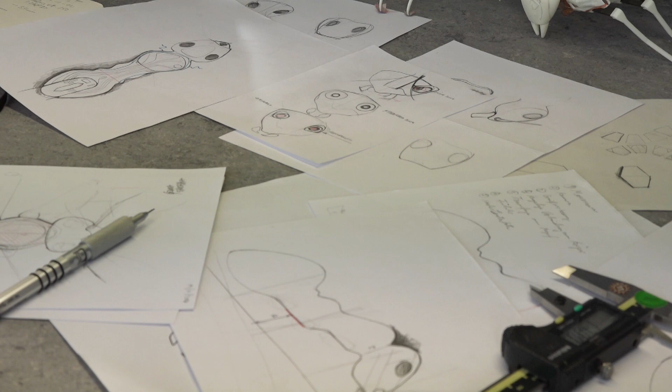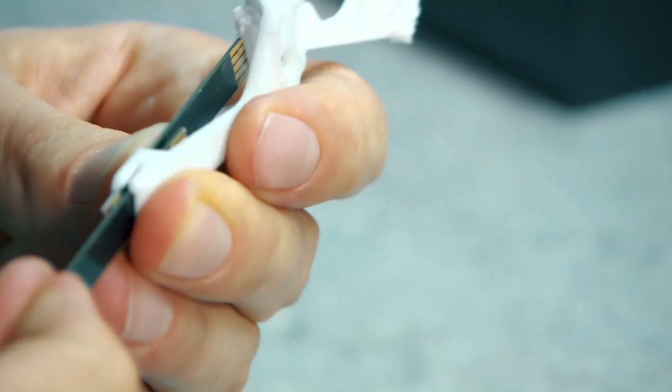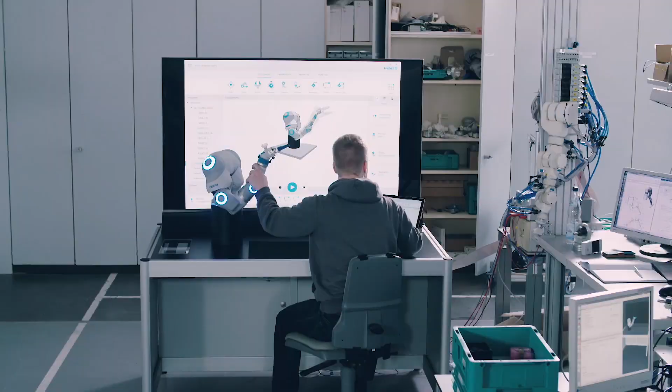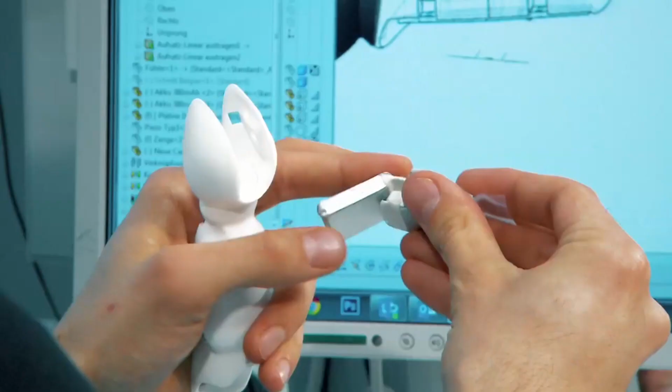I was mainly interested in moving objects, so robotics was the most interesting field, of course. Professions like engineers, computer scientists, technicians, and so on are employed in the world of robotics. A common thread in all these professions is that they are interested in solving problems and in guaranteeing functionality. However, robots still have certain reputations among humans in today's world because they still look like weird and complex machines. Therefore, it is very important that designers deal with robotics in order to give robots a form that looks natural to people and at the same time provide forms of communication that better suit people.

And that is where designers come into play.

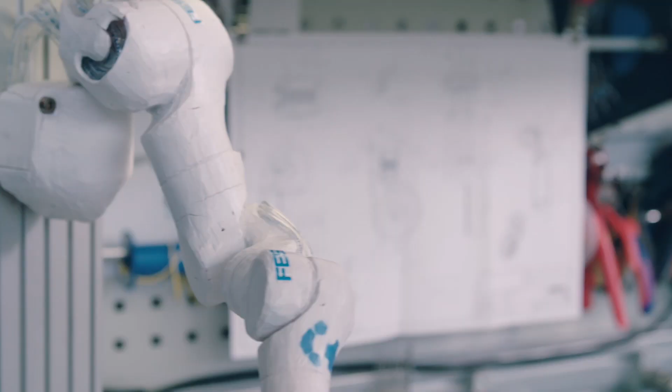In my work as an industrial designer, I see myself as some kind of hybrid. On the one hand, I see myself as a mediator between man and technology and, at the same time, as someone who creates something new, together in an interdisciplinary team. Collaboration with several disciplines is especially important in robotics, because there are many different problems to solve so that you can create a lifelike object at the end.

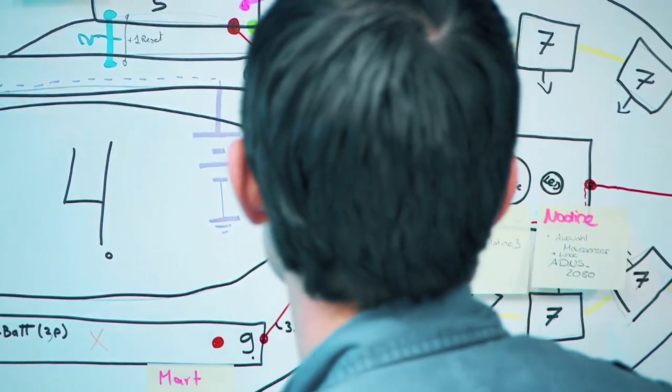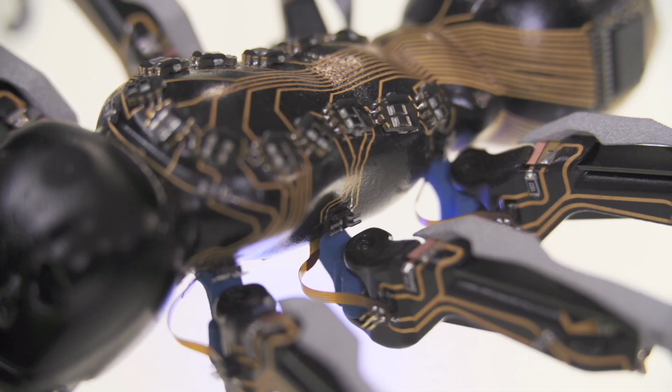In such an interdisciplinary team that mainly consists of electrotechnicians and mechatronics engineers, designers are facing a constant struggle. Of course, I would like a robot to look elegant, beautiful, organic and pleasing to the eye. But an electrical engineer would also always like to have a rectangular printed circuit board and as much space as possible.

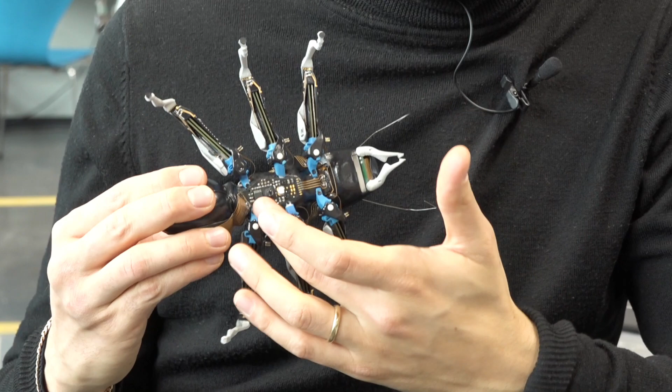So you always have to deal with conflicts, and in case of the BionicANT, we try to integrate the plates in a way that they cover the whole body and do not make the form look overly technical.

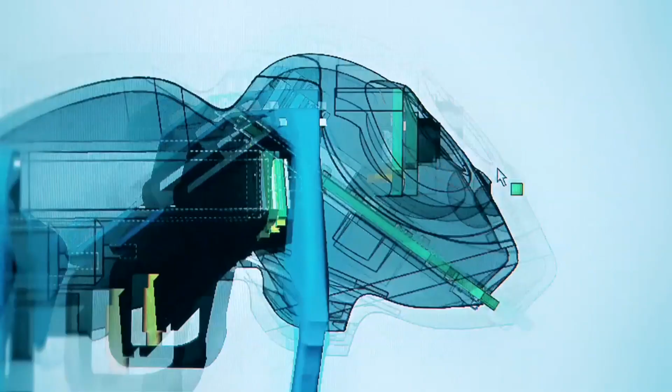If designers try to copy nature, it is not realistic to expect the design to be completely perfect. However, you always have the advantage of having a model from the very beginning, so that you know how the robot has to look in the end. This is helpful in the interdisciplinary cooperation with other group members, because you can tell them what it should look like, or at least how to make it as similar looking as possible.

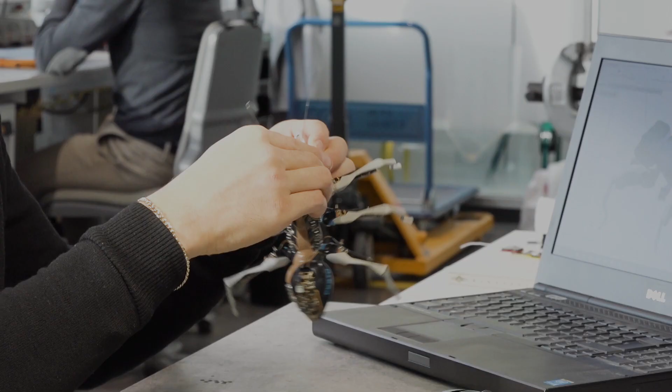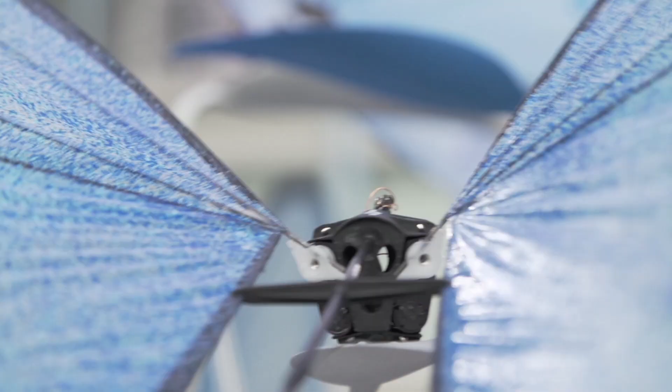Being a designer, I'm always fascinated by nature. There are so many different materials, so many shapes and colors. It's astonishing to see how little nature needs to manage things and how we, as human beings, still lag far behind with our technology. If we build a flying object and argue about every single small detail, and then a fly flies by in the evening, I'm always very humbled by what we as human beings cannot achieve compared to what nature already has.

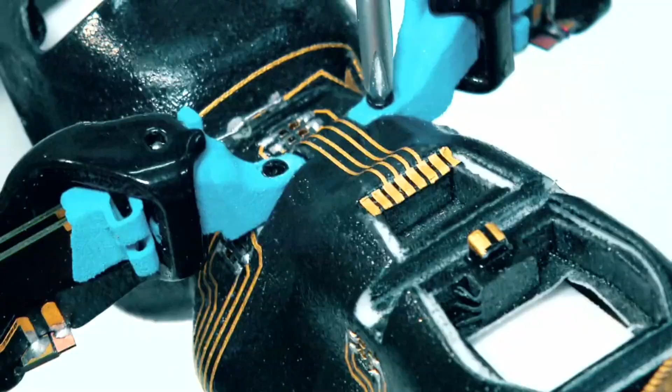Studying industrial design first requires interest in all sorts of things and to have an eye for beauty and things that are aesthetically pleasing. It is also important to have manual skills because you build a lot of models. But the most important thing is to have fun in creating things and putting your own ideas into practice, and to have the courage to do so.